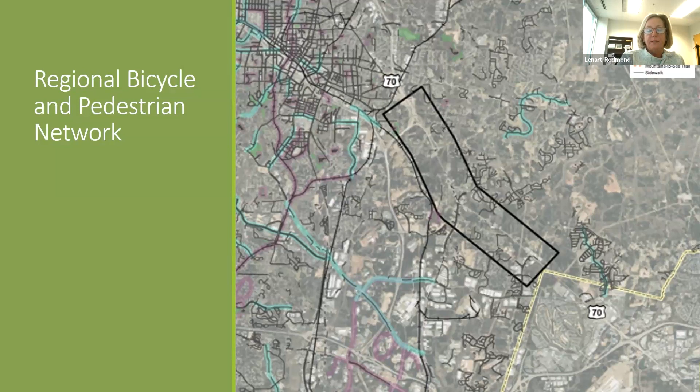What we learned is that there were low volumes of bicyclists and pedestrians crossing over US 70 today. Most of the bike and pedestrian activities are centered around the Angier Avenue and US 70 intersection area, as well as South Miami Boulevard, Sherron Road, and Mineral Springs intersections. Future development will only increase demand for bike and pedestrian facilities going forward.

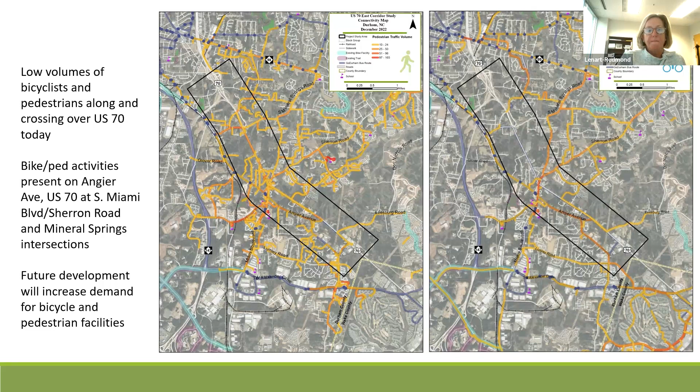As far as existing transit routes, the fixed routes are mainly within the study area along Angier Avenue today. There is no fixed route bus service along US 70 today. US 70 has been identified as a second tier bus rapid transit corridor from a FAST study done back in 2021. However, there are no BRT improvements planned in the current 2050 DCHC MPO Metropolitan Transportation Plan.

There's also a future Route 200 from Durham to North Raleigh. That's a study that's about to be underway, currently in the feasibility study stage. So there are some existing and future bus routes planned for service in the area.

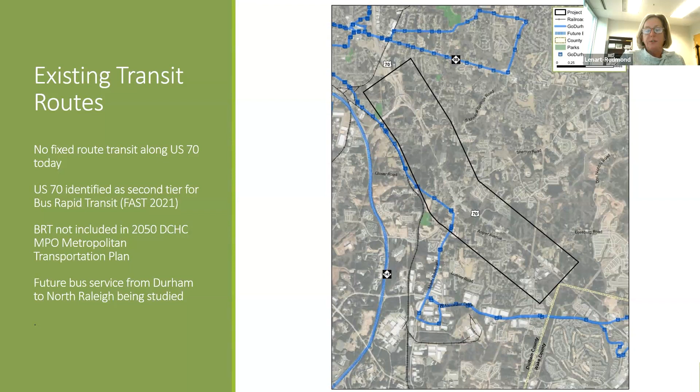We also performed a 2050 traffic analysis that showed most intersections in 2050 will operate at a level of service F overall, with substantial queuing throughout the network.

When the study team developed these alternatives for the 4-lane boulevard section, we made several assumptions. We decided to use innovative intersections to relieve congestion for both alternatives presented today. Now, alternative 1, the 4-lane boulevard section, we also assumed there were going to be no bridge structures at the intersections — everything was going to be at one level.

But with alternative 2, we also used innovative intersections to relieve congestion, but we did introduce bridge structures at Pleasant Drive and at the future Glover Road extension. Both alternatives incorporate multi-use paths and provide bridge opportunities to cross US 70.

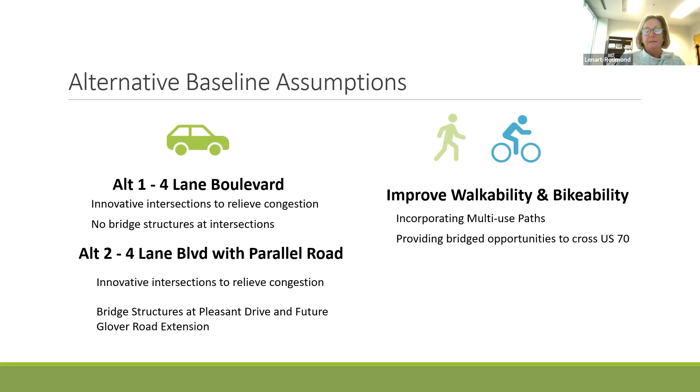Weston Murphy is going to talk a little bit more in detail on each of the alternatives and the innovative intersections that we are using along the corridor.

They're median U-turns, which eliminate left-hand turning movements and reduce delay, providing shorter wait times for vehicles traveling along US 70. Median U-turns are cost-effective compared to adding additional lanes to increase capacity in general, and they improve vehicular safety by reducing conflict points.

This is a schematic of how to navigate a median U-turn. Through the elimination of left-hand turns and pedestrian signal enhancements, it makes it safer for bicyclists and pedestrians to cross US 70. To make a left turn from US 70 onto a side street, vehicles would have to go through the intersection and make a U-turn before turning right onto the side street. Eliminating left turns again makes it much safer for both bicyclists and pedestrians.

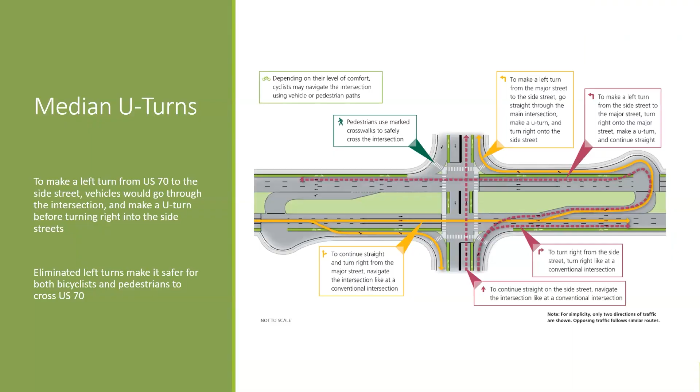And if you could pause here and go back, there was a question about seeing lots of grades assigned based on traffic flow. I don't know if you or Doug would like to address what's in the chat. Okay, let me see, where is the chat? Hold on.

The question is, I see a lot of grades assigned based on traffic flow and predicted traffic flow. Are these equivalent grades for pedestrian, bicycle, and transit flows? If so, how are those balanced with single occupancy vehicle flow? And that could be any team member that takes it. Okay, I'll start off, but I'll allow Trent Moody to chime in here.

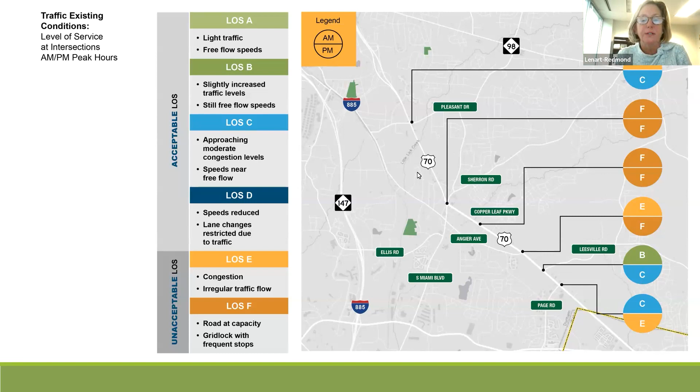But basically, these level of service grades are for vehicular travel along US 70. I don't know if Trent, you want to chime in a little more. I know there was consideration for bikes and pedestrians in developing the alternatives on these innovative intersections, but it's not reflected in these particular grades.

Right. It was more of a qualitative look, I believe, from a bike and pedestrian standpoint, in relation to their comfort. Of course, with median U-turns, as Ann was mentioning, they reduce the amount of conflict points. You no longer have left turning vehicles crossing marked crosswalks with pedestrians, so it makes the pedestrian crossing much safer.

There's also ways to incorporate signal timing into the crossing through leading pedestrian intervals, which would allow the pedestrian to enter the crosswalk sooner, so that drivers are aware of their presence and give them a bit of a head start. So there are some design components that can improve pedestrian comfort and safety with these types of improvements.

Another question here, Trent, was that it? I didn't want to cut you off. No, that's fine, we can move on. Another question was with the new 885 connector, the grade at Pleasant Drive and 70 should be lower during peak times. So I don't know if there's any commentary that could be shared about the grade at Pleasant Drive and 70.

Correct. As Ann mentioned, we did use the base year of 2019 as our starting point, reflective of these quote unquote existing conditions. Maybe base conditions may be a better way to describe what's being illustrated here. So that would be prior to the 885 connection. The struggle with this has always been having reliable data with the pandemic, so we really went back to 2019 as our starting point for a lot of our data to date.

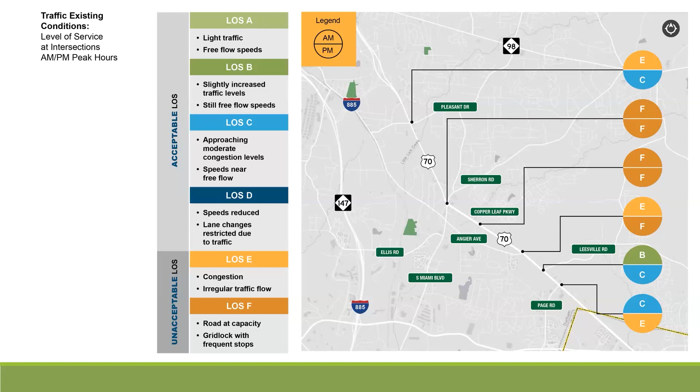Another question: were traffic circles considered as an alternative to left turns or U-turns? Certainly, and I believe the last slide flashed before we started the questions showed there were some roundabouts, incorporated in combination with median U-turns and what are called bow tie intersections. The roundabouts on the side street kind of replicate a bow tie from that standpoint. So the roundabouts are more on the side streets, whereas the volume on 70 would not be conducive to processing traffic at a roundabout on the main line itself.

Okay, and with the boulevard design, what is the level of service for US 70 in this East Corridor for 2050? There are segments that still perform, there are intersections that do perform at LOS F. However, by and large, you'll see in future slides that travel times do improve. When you look at it from a corridor perspective, there are some signals that somewhat meter the traffic, allowing other intersections to operate with improved, less delay. But there is still some complication with the amount of growth projected with the 4-lane boulevard concept.

And I think next to last question here: are median U-turns permitted on a roadway that is freeway rated as a section that feeds 885? I'm not sure if I understand the question clearly. However, if the roadway were classified as a freeway and went to a freeway design standard, there would be no median U-turns, there would be no at-grade intersections there. So the segment here is basically a boulevard transition point between the freeway as 885 is approached.

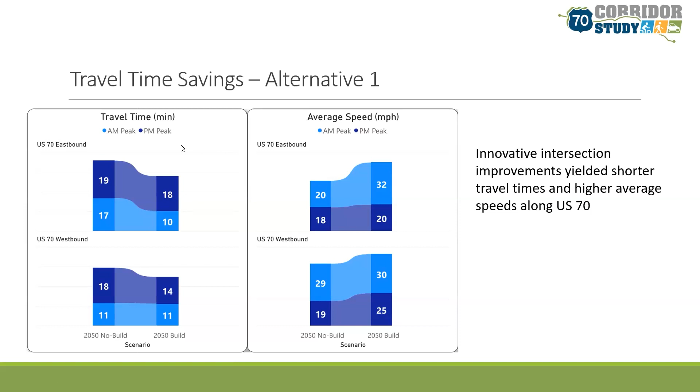As Trent mentioned, we did take a look at travel time savings comparing the 2050 build alternative for alternative 1 against the no build. And we see in general, the innovative intersection improvements yield lower travel times and savings and higher speeds along US 70. Due to the diversion of local trips off of US 70 to the parallel roads, alternative 2 would show even shorter travel times and higher average speeds along US 70 than alternative 1.

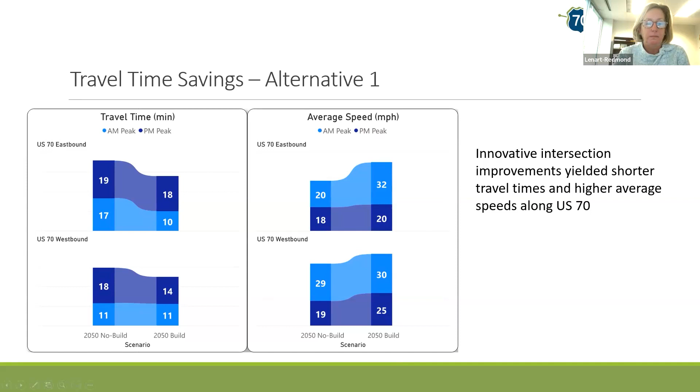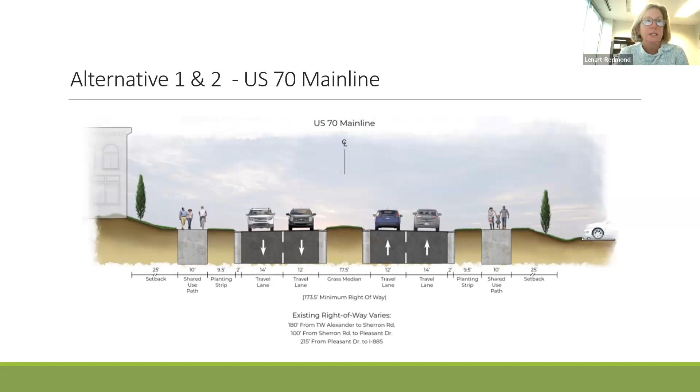So first, we're going to look at the typical sections. This is the same typical for both alternatives along US 70. So you have 2 lanes each way, and a 9.5-foot grass buffer between the multi-use path and the edge of travel of the road, with 10-foot multi-use paths along both sides of the corridor.

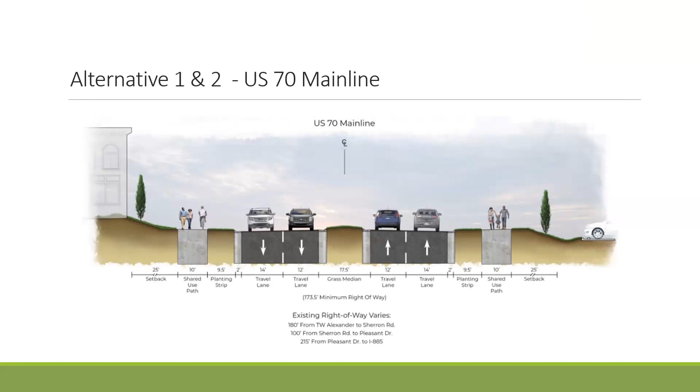So this is on alternative 2 where we have the parallel roadways. We reduced that grass buffer to 4.5 feet since it's a lower speed roadway, and we still have 10-foot multi-use paths on both sides.

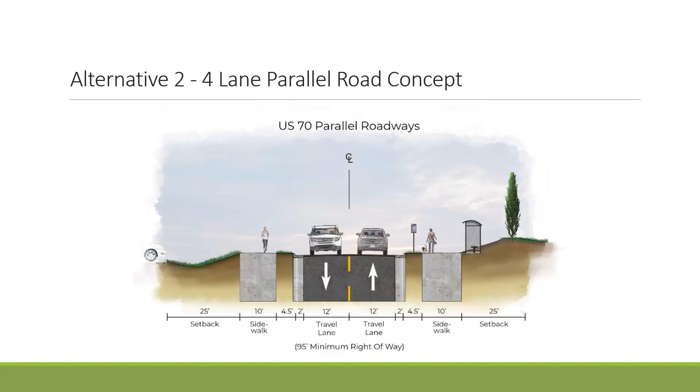And then I'll start to share my screen here to show you the concepts. Yep, I stopped sharing. All right.

All right, so here we're going to start at the northern end of the corridor. Here's the East End connector. You got 885 here, we got Lynn Road, we got Pleasant Drive up here and down here. We also have a future Lynn Road extension up there. You can also see here, these white areas are the future developments coming in. Also note that this yellow shade is your multi-use path or sidewalk.

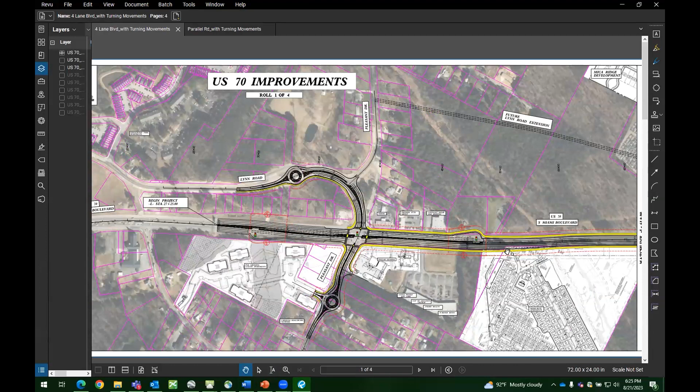So I'll go through how to navigate this intersection in more detail. If you're traveling south on US 70 and you want to take a left onto Pleasant Drive or Lynn Road here, you would go past the intersection and use this U-turn to then take a right turn onto Lynn Road. And the same thing going the opposite direction, you would use this U-turn to go left onto Pleasant Drive.

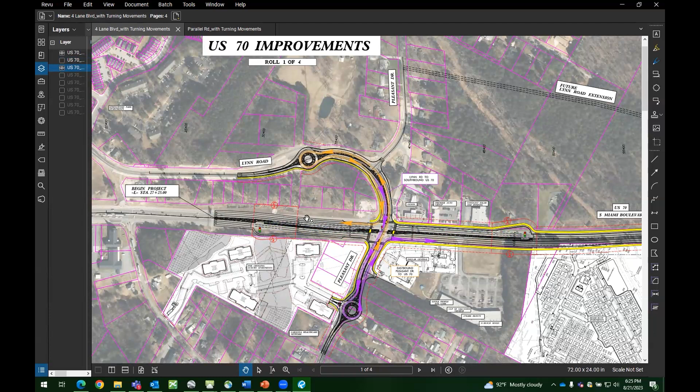And then if you're on the side roads and you want to take a left, so you're coming up Pleasant, you would go through this intersection, use the roundabout, come around here and take a right to go north on US 70, and vice versa. If you're going down on Lynn Road here, use this roundabout to go south on US 70. We've also added these crosswalks there for bikes and peds. It's much safer for bikes and peds to cross this type of intersection compared to a traditional intersection—you have a lot fewer conflict points because those left turns are no longer there.

And then here we put in some bulb outs, so these are to access these businesses on this side. So you're driving south on US 70 and you want to get over to JJ's Fish and Chicken—you could use this U-turn to access the business on that side, and vice versa, coming up the other way, you use this U-turn to access this side of the road.

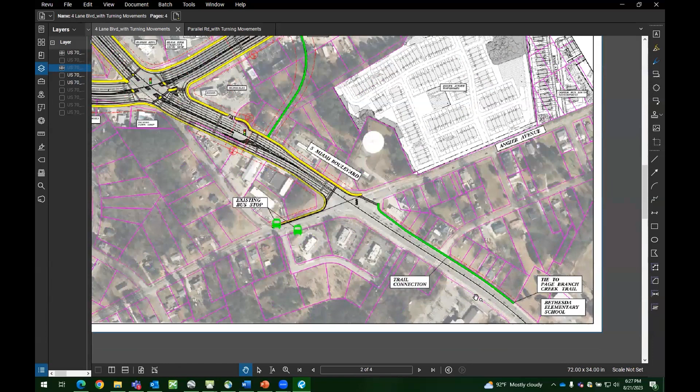So here we have Sharon Road and we have Miami Boulevard here, and also Angier along the bottom of the screen there. This is one of the trail connections we're proposing in green. Up here is the tie to the future Lick Creek Trail, and down here along Miami, we're tying to the existing multi-use path at the elementary school to Page Branch Creek Trail. We're also showing 3 different pedestrian bridge options on this concept.

So these bridge options could go either on this concept or on the next concept that we'll look at, but we don't intend to build all 3 of these bridges. We're just going to build one of these, and we want to get your feedback on which ones you would use, which ones you want in this area—just trying to get an idea of what the public wants.

So I'll now go through how to navigate this intersection here at Miami. It works just like we saw before with the median U-turns. If you're on US 70, you go through the intersection, use the U-turn both ways.

It's a little different on this road here—we don't have a U-turn here. So instead you would go right through, take a left onto this little side street, and then take a right onto US 70. And it works the same with the median U-turn if you're going south.

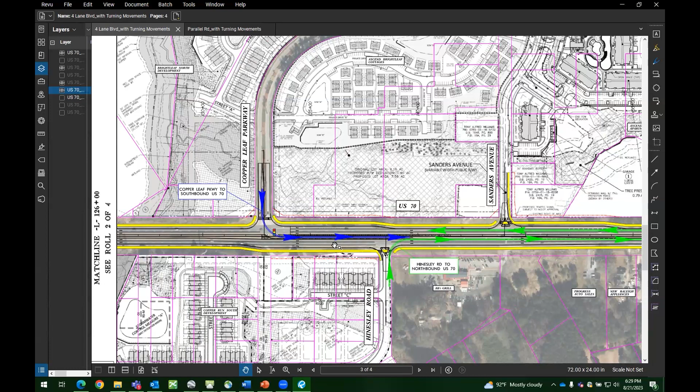So at Copperleaf, we're currently showing a green tee with this option. The way a green tee works is you're not allowing left turns into Copperleaf, but you do allow the left turns out. It's called a green tee because the southbound direction here always stays green and never has to stop. Just this direction gets stopped to allow this left turn to come out.

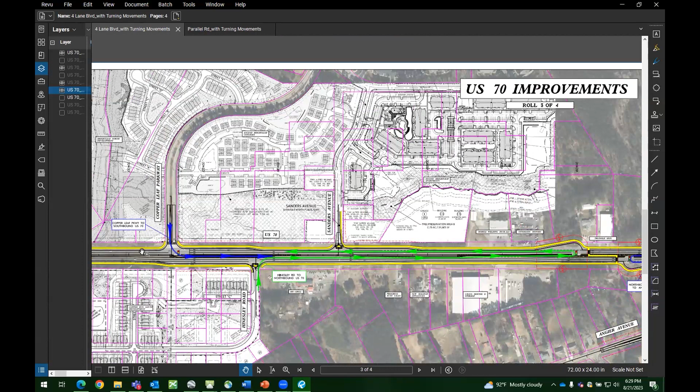And we put in a U-turn here because if you're on Hinesley and you can't take a left out, you would need to take a right and use this U-turn to go left onto US 70.

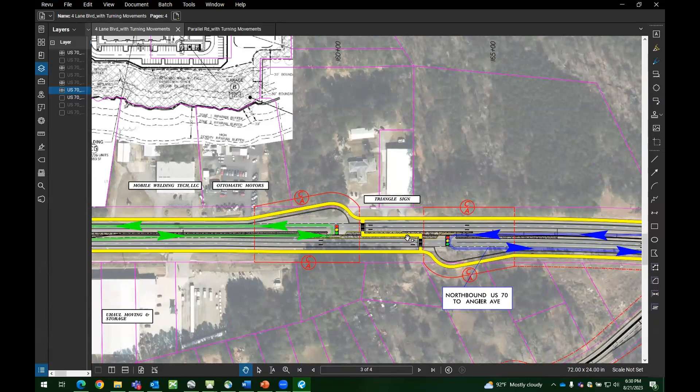In this option, we're showing a mid-block crossing here in between our two bulb outs. This is a safe way to cross with there being a signal on either side, and this could be incorporated into either option.

We'll move down to the Angier Avenue intersection. This works just like the other median U-turns going through the intersection, using the U-turns to replace the left turns.

Same thing on the Y lines. You would use these roundabouts to replace the left turns at the intersection level. And this ties into the future development with the roundabout here.

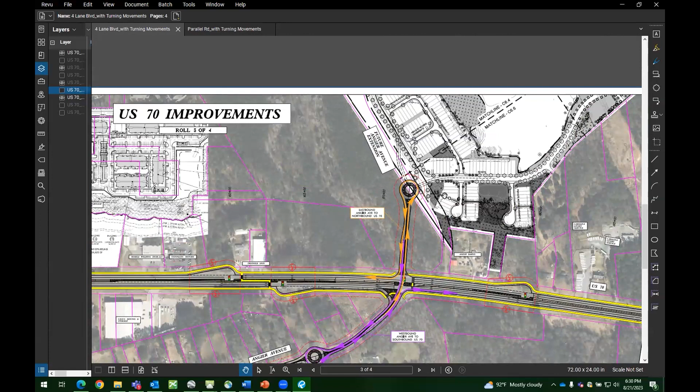We'll continue down to the last sheet here.

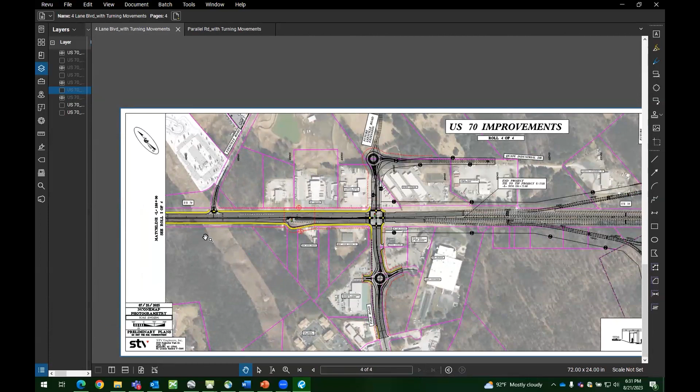So here we got Leesville Road, and here's the future Leesville Road extension that we bring into a roundabout across the street from Page Road. This works very similarly to the other median U-turns that we looked at.

There is one minor difference here. As you go through, you notice there's no U-turn on this side. So instead of using the U-turn here, which we didn't put in due to the proximity of this interchange, you would actually follow the green here, just take a right, use this roundabout, and do a left in that fashion.

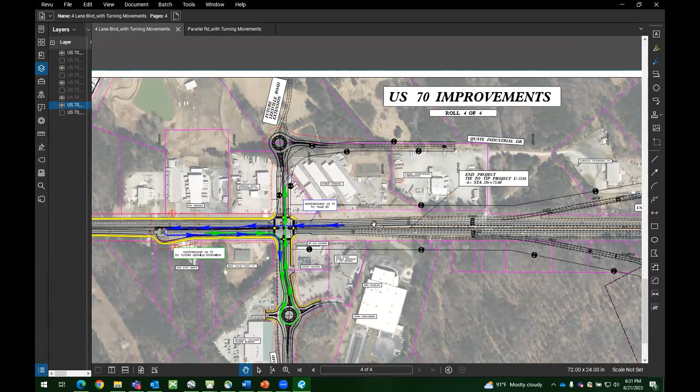And you could do the same thing with blue. Instead of using this U-turn, you could use this roundabout to take the left. You kind of have multiple options there.

All right, we've got a few questions in the chat if you're ready. Sure, yeah, we could take some of these questions on the first concept.

Yeah, and there's different folks who may need to respond. But the first one is, do these designs take into consideration future development, such as the new multi-housing development coming into the Brightleaf off Copperleaf Parkway?

So yeah, we did consider all the developments that we had access to here. We did try to incorporate our designs with the developments that are coming in.

Does the proposed design speed limit need to be such that traffic circles would not work along US 70? Is the plan to increase traffic passing the established businesses on US 70?

I can let Trent speak to this more, but I believe roundabouts don't have the capacity to be on US 70, is that correct? That's correct. Really the existing volumes today are such that the roundabouts along 70 would not function well, and then compound that with planned future growth, which would also impact the operations of roundabouts on US 70.

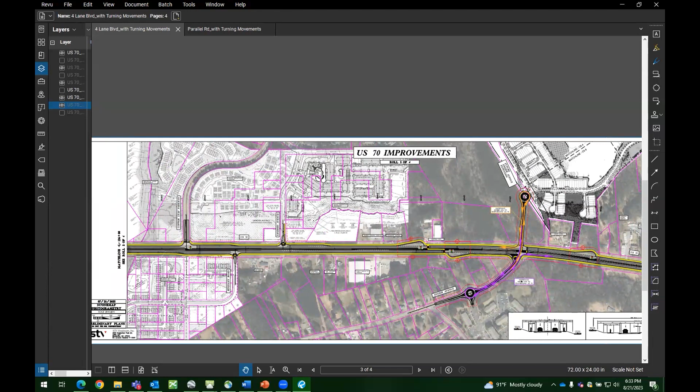For the proposed peak hour speed for 2050, will this back up traffic on the freeway on I-885 and Wake County Freeway?

I'm going to try to get my bearings right here. Yeah, right, so on the northern section there towards 885, there are, in future scenarios, there is queuing at that first U-turn bulb that does back up. And I believe that is consistent with what is today, unfortunately.

Where is there an existing boulevard design in the area with the same volume?

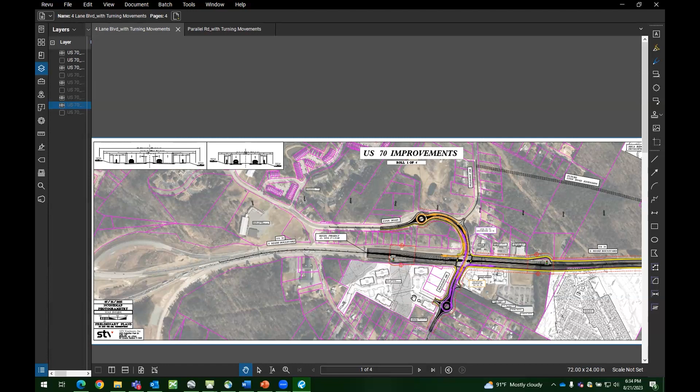I think the person's asking for a similar design as well. I can't think of one off the top of my head, but Trent, Ann, you want to chime in there? We may not have examples within North Carolina, but there are a few examples outside the state. There was the Woodward Avenue in Detroit, an example of a boulevard section with innovative interchanges, and we can share that information. There's also another project with similar traffic volumes in East Lansing, Michigan. And we also looked at the James Dodds project down in South Carolina. There are probably three other examples of similar traffic volumes using boulevard sections like this, so we wouldn't be the first.

The next question is, what are the traffic volumes now on US 70, and what is proposed to be the traffic volume on US 70 in the year 2050? I don't want to steal anybody's thunder - is that part of the presentation? I can't recall if there was an ADT slide or not.

No, we didn't have future volumes on the slide. We spoke mostly to our existing trend. The volumes do range - it's greater along the northwest side as you go inbound into Durham. I think they range from about 35,000 to 45,000, the last historical record there of AADT. When we were projecting volumes, we used the regional travel demand model to account for future growth, as well as prior studies, and applied roughly a 1.5% growth rate throughout the US 70 corridor, which would result in... let me try to pull up something here. Yeah, we looked at 2050 traffic volumes, which correlated to the regional model.

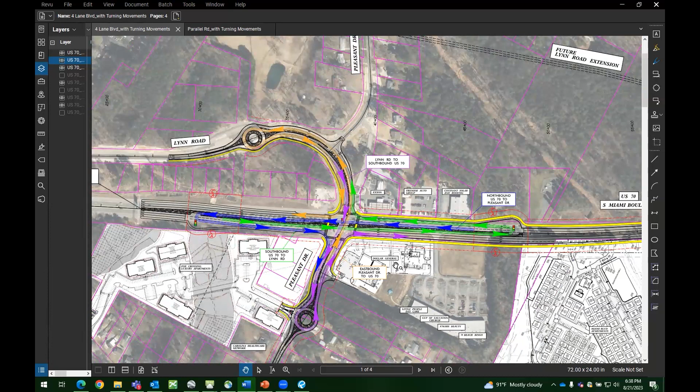How will these designs facilitate the transition from higher speed roads at either end of the corridor to a lower speed environment within the study corridor? This would be handled the same way as in today's environment - you'll have advanced warning signs, and things can be done as far as reducing lane widths, or with pavement markings, in order to help cars visualize the change in design speeds.

Another question about the parallel roadways: are the sidewalks really multimodal, thus allowing bicycles? If so, maybe consider renaming them to encourage bikes and other human-powered vehicles. Otherwise, are bicycles expected to ride along the parallel road? We haven't really got the parallel road concept yet, but we do have a multi-use path alongside those. I'm not really sure what the question was there - maybe we'll address that one when we get to the parallel roads.

The next question was, what is the level of service for the Miami Sherron Road intersection?

Pull that up here and I'll take that question. Does the design improve the backup on Sherron Road in the morning at the intersection with Mineral Springs?

It does do that. The level of service is improved, and the delays do improve compared to the no-build with the innovative intersections. That said, there is some metering involved because we're running these simulations so it operates kind of as they would in the field. So if someone is upstream or downstream at a traffic signal being held up, the volume isn't necessarily getting through, but that is why the level of service may be a little bit improved compared to what one would traditionally believe.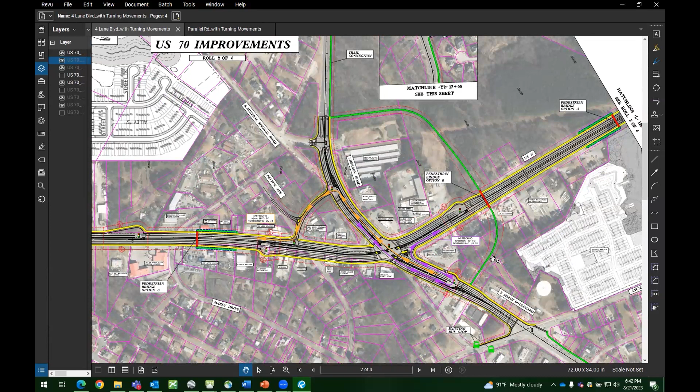So yes, one of the bridges that get incorporated could accommodate a bike, but you also have the option to use the multi-use path and crosswalks at this intersection as well.

I'll do two or three more and then we'll move along with the slides. What happens if the median U-turn lane fills up? Does it block the left travel lane?

Yeah, that would be what happens if there are enough vehicles trying to get over for the U-turn. That would be a possibility, I suppose, in heavy traffic.

And will turning right on red be allowed for vehicles entering US 70? I'm concerned about pedestrian and bike safety at some of those crossings. Also, will there be crosswalks for pedestrians? The gaps between the proposed crossings in these drawings look nowhere near where people would be or want to go.

From a right-turn-on-red perspective, that's a bit further along in project development as you get into the design, but you certainly would have the capability to incorporate added layers of safety, like blank-out signs, for instance. These would be digital signs that could read 'no turn on red' when a pedestrian has activated the crosswalk, for that added layer of safety. So that's something that could be incorporated into the intersection design at a later stage of development.

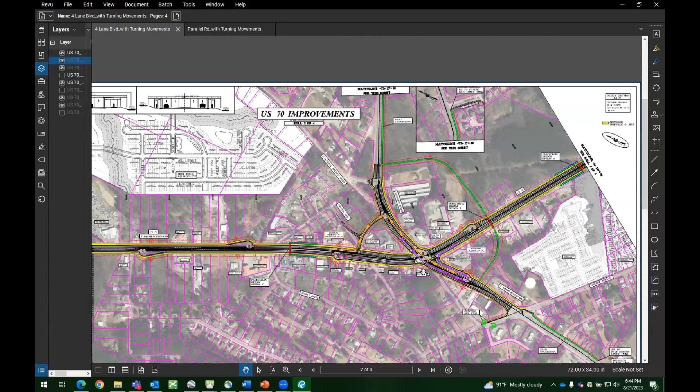Weston, you may want to zoom in on that intersection, for instance, just so they can better see the crosswalks. Zoom on in. There you go.

Were there any more questions, or should we move on to the parallel road? Yes, please feel free to move on. Thank you, okay.

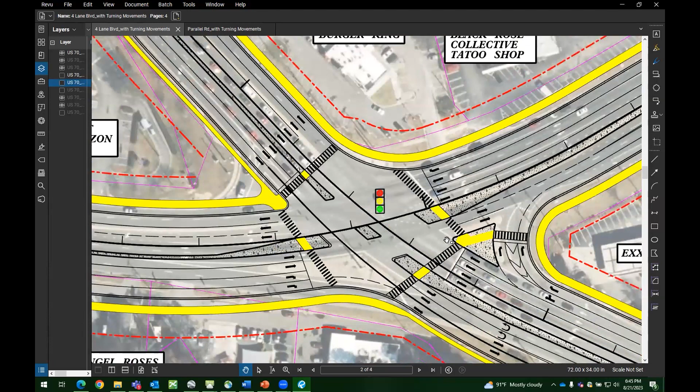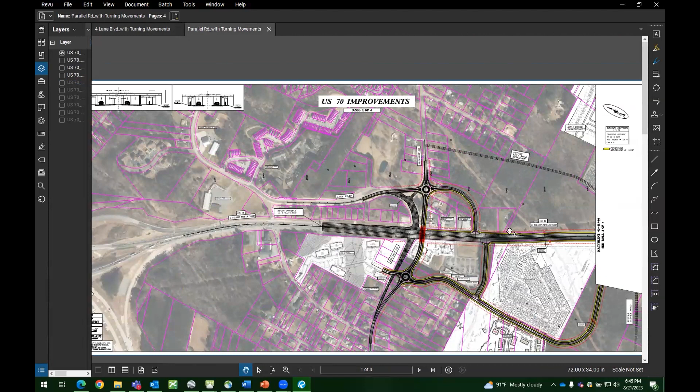So we're back on the first sheet, 885 over here, and US 70 coming down. This is a little different than the median U-turn intersection that we saw before. I'll quickly go through - first I'll give you the key differences on the parallel roads.

So the main differences in the two concepts are: we have a bridge here at Pleasant, and we also have a bridge at the future Glover that you'll see on the next sheet. The other thing is the addition of the parallel roads.

The intention of these parallel roads is to serve these businesses. These businesses that now get access from the parallel road would have their access taken off of US 70, so there'd be a lot less right-in, right-out directly on US 70. The other benefit is it gives bikes and pedestrians a lower speed roadway to travel along the US 70 corridor without being right next to a higher speed roadway on US 70.

And the other benefit of putting in a bridge is it's a much safer crossing than having an at-grade crossing. Now I'll go through how to navigate this intersection.

If you're on US 70 and want to get to Pleasant Drive, you come down here and take a right onto this parallel road, then go either way onto Pleasant Drive. Vice versa, if you're coming north on US 70, take a right onto this parallel road and go either way.

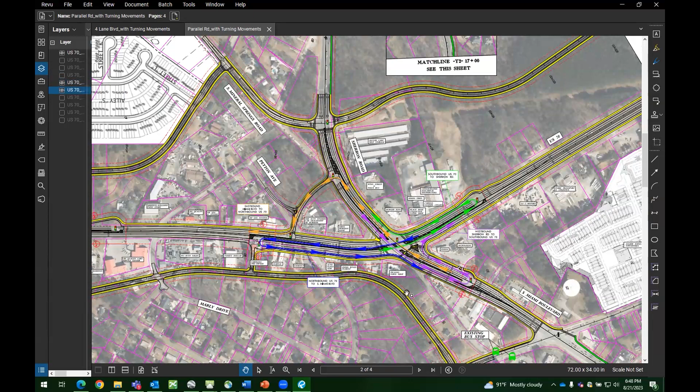This intersection operates the same way as the previous concept with these arrows here. And as a reminder, those pedestrian bridges we saw in the other concept could be incorporated into this one as well. So don't forget to fill out the survey and provide your feedback.

Here's a trail connection as well shown on this concept. And we are showing crossings at all of these intersections with a multi-use path.

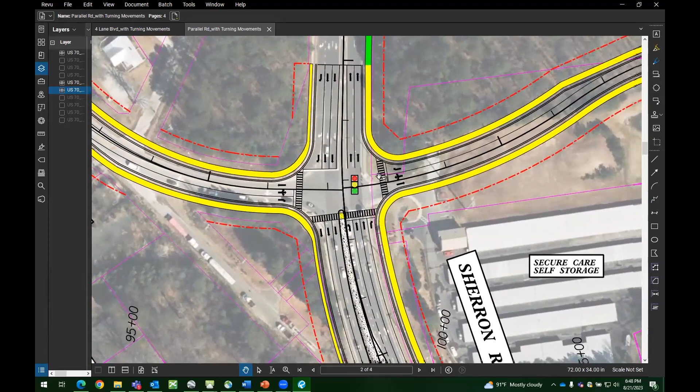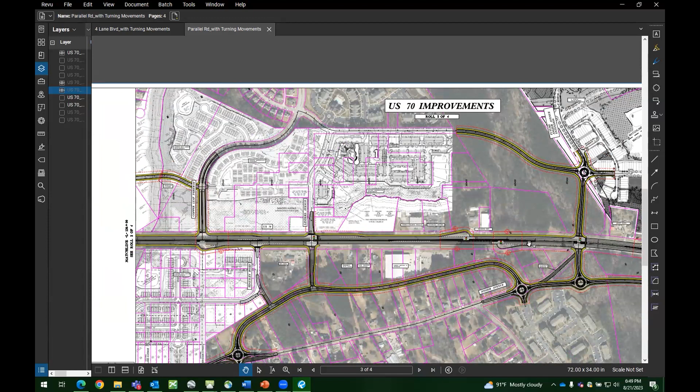I'll continue down the corridor here. You can see our parallel road is now tying into Copperleaf Parkway. We're using Copperleaf Parkway as kind of our parallel road to tie into—that would act as that. You wouldn't be able to provide access to businesses off US 70 here because it's so far away, so not every business would be able to get access from the parallel roads, but we would do that as much as possible.

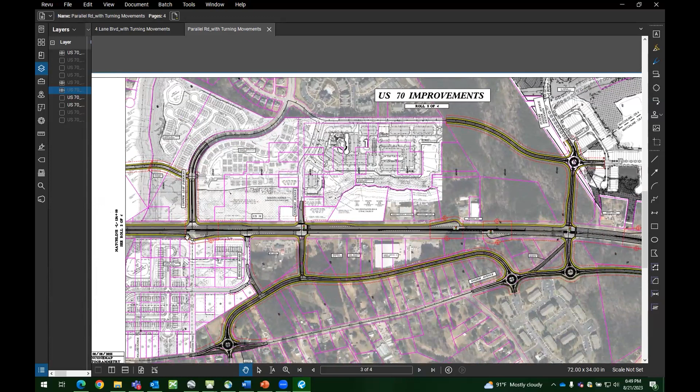This intersection differs a little bit from the first concept I showed you, the green T here. It's now changed to move the main intersection to Sanders, so you would have a median U-turn at Sanders. If you wanted to take a left on US 70, you'd come here, take this U-turn, and then go that way, and vice versa in green.

And then Angier operates the same as the other concept would—median U-turns like we've seen before, using the roundabouts to replace those left turns on the side roads.

You can notice that we're not showing the mid-block crossing in this concept, but that could be incorporated if that's something that's desired.

I'll move on to our last sheet here. This is very similar to the previous concept, just with the addition of these parallel roads tying into the roundabouts. We also extended Quate Industrial Drive up to the future Durham Parkway that you see there.

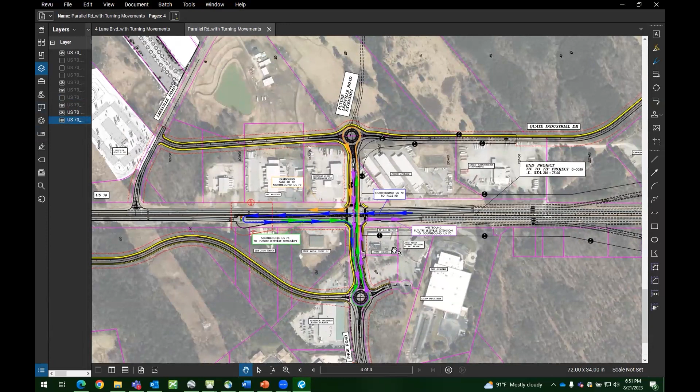I'll turn on these arrows so you can get a reminder on how to use these median U-turns and roundabouts to replace those left turns. And that pretty much wraps up the overview on the parallel concepts.

Thank you. We can answer some more questions if there are any. Let's take some more questions. So one of them—have sightlines been analyzed at all?

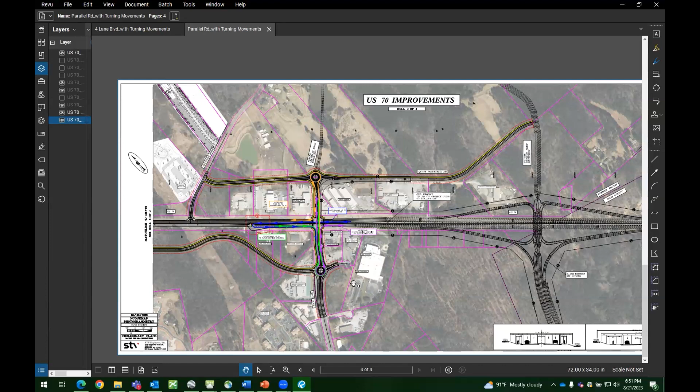The question is whether alternative 2 substantially improves sightlines for turning from Angier onto 70. So we're asking about sightlines. No, I did not do sight distance calculations—we're not at that level of design, but we did look at increasing sight distance in a general sense. You can see that this is very skewed, and we made it more perpendicular, which would help with sight distance, even though we didn't go through the tedious calculations for all these intersections.

And at these roundabouts, they're generally the size that they would need to be, and they do have a lot better sight distance than normal, or than some of these existing intersections do.

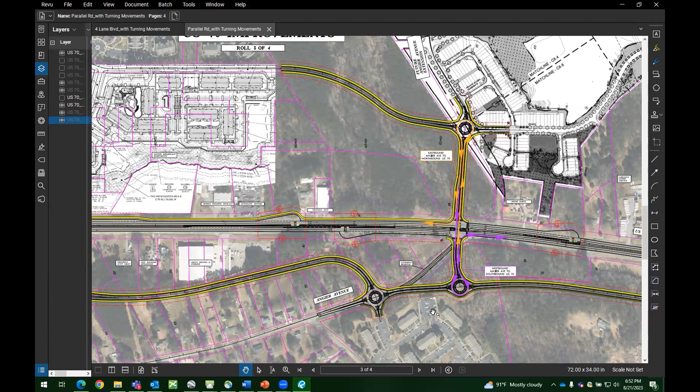There was a question about 50 driveways being eliminated. How many access locations will remain, and are these all on a secondary roadway? I don't think we calculated the amount of driveways that will retain on US 70, but the 50 driveways was the approximate amount we can relocate from US 70 to the parallel roads.

The next question is Angier Avenue. Oh, I'm sorry, did I cut you off? No, you're good, you continue.

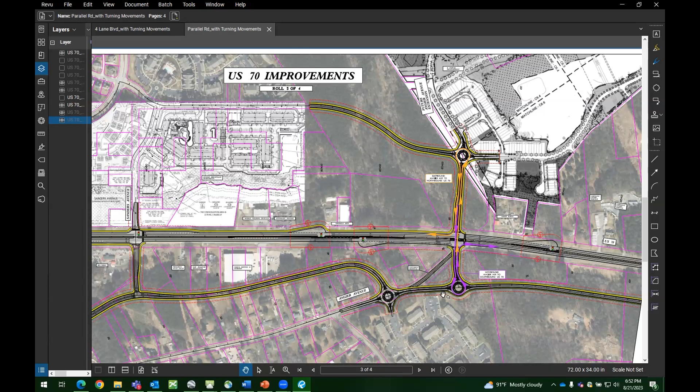Angier Avenue at Miami doesn't have any improvements and is already an issue, and now the parallel road will put more vehicles into this intersection. Do you have plans for any improvements? With this concept, I don't think we're proposing improvements along Angier. That wasn't part of this study.

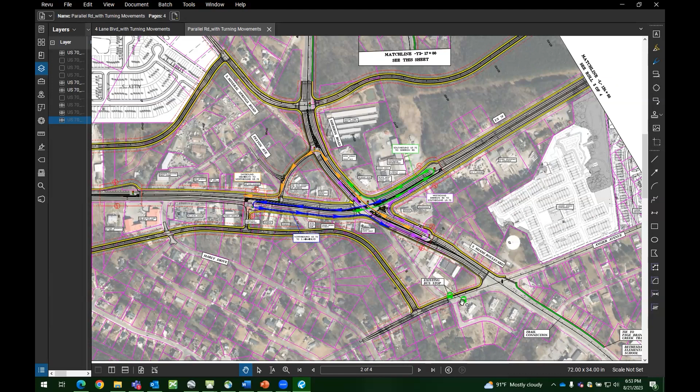The next question is, there's at least one intersection that only has 3 crosswalks. Is that intentional, and could the design be improved to incorporate marked crosswalks at every side of the intersection, since drivers struggle substantially with unmarked crosswalks? So I guess this was the intersection you saw with 3 crosswalks. We could add another crosswalk there. There's not really a real reason we didn't show that, we just figured it may not be needed, but that can definitely be incorporated.

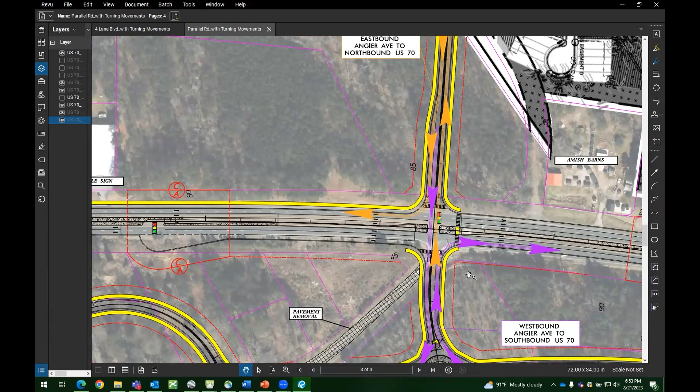Why isn't there a light at the Copperleaf U-turn? There should be, I think that's just a mistake. We should have a signal symbol here. That's a good catch.

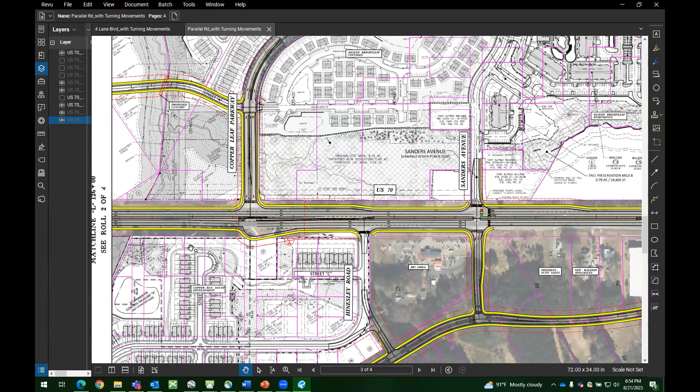Can you please explain how 70 Miami Sherron Road would improve with either of these alternatives? I think they're concerned about the left U-turn still being choke points, coming through here with these U-turns backing up into the through lanes. Is that the concern? That's as best as I could make out from the question. I can let Trent speak to the traffic, but I think this innovative intersection does handle the traffic better than the existing conditions would. It may not be the same as a freeway, but it's definitely less impactful. I could let Trent expand on that.

That's correct, Weston. And the other thing to bear in mind is that these signals are much simpler phased, essentially two-phase signals allowing east-west to go together as one phase and north-south together in one phase. You no longer have to give dedicated green time for left turns and stop opposing through movements, so the simplification allows for more throughput. We've also designed this knowing queuing could occur, having certain through lanes flow into these U-turn lanes so drivers could pre-position themselves while still being able to use the outside lanes to get through.

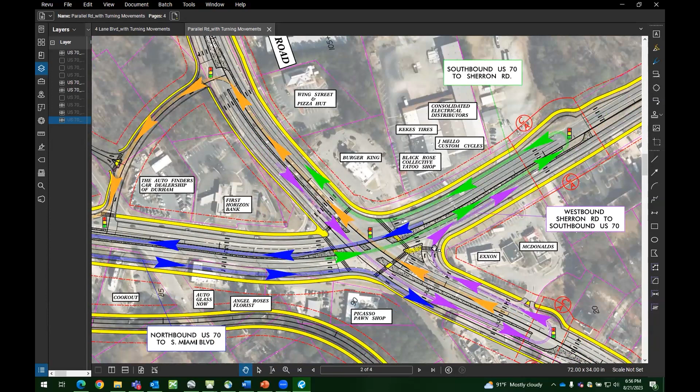Will all these roundabouts slow the overall speed of cars in the area, and if so, is this plan technically more safe for cycling and pedestrians versus alternative one? In terms of the roundabouts, they're by and large on the parallel routes and side streets, so yes, they would serve as a traffic calming device to slow speeds entering and exiting the roundabout, thus improving safety and the interaction between vehicles, bikes, and pedestrians through the network.

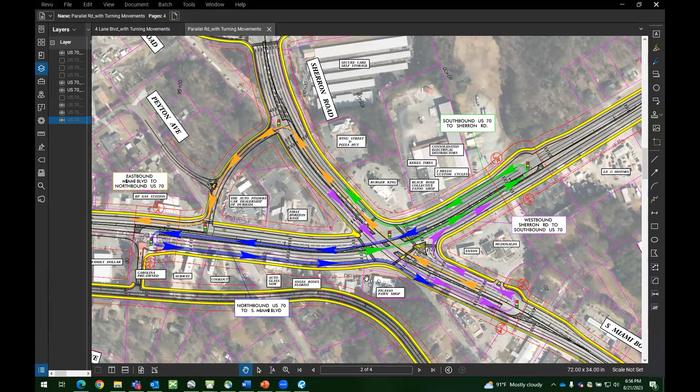A curious question overall is cost. Which of these alternatives is lower in terms of estimated cost? Alternative one, the 4-lane boulevard.

Andrew Avenue appears to be in the study area and is an important parallel street. Is there a reason it cannot be made into a 3-lane street with curbs and protected bike lanes? I guess there's no reason that can't be done, it just wasn't part of this study.

Somebody already asked about cost. Are you going to widen the lanes from 2 to 3 per direction? No, the 4-lane boulevard is the same on both concepts, 2 lanes in each direction. With the addition of turn lanes that would add a few third lanes, but the throughput is just 2 lanes each direction. We were asked to consider a 4-lane section because that's in the Metropolitan Transportation Plan. We did look at how volumes would flow with a 6-lane section regarding traffic diversion, but our charge was to develop a 4-lane section.

How many lights will be on the westbound lane and eastbound lane for alternative 2 and 1?

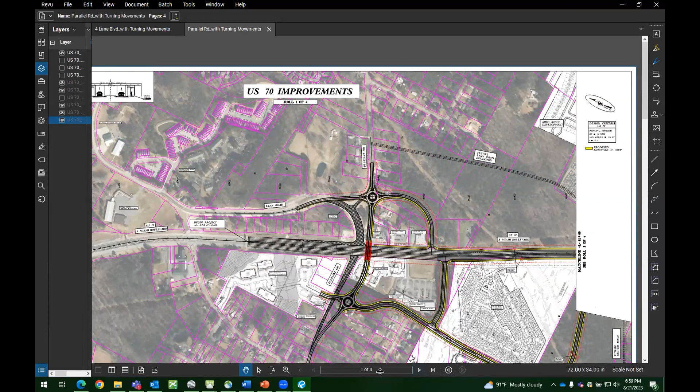With the exception of these 2 bridges that we added, you'd have 3 less signals here: 1 at the U-turn bulb, 1 at the intersection, 1 at the U-turn bulb. It's hard to answer on the fly, but it would be slightly less on the parallel road.

Thank you. We've got about 3 or 4 overall questions that apply to both alternatives. One is whether the results of the study will decide which design is implemented, or if there will be other alternatives. We are hoping to get feedback today on these 2 alternatives, and we do have the ability to take certain components of one over the other to get a preferred alternative.

And how will either alternative affect businesses in the study area? Well, due to the parallel road concept, some businesses will lose direct access to US 70, but they will gain bi-directional access via the frontage roads for the most part. So they remove direct access from US 70, but you get it on the parallel roads, bi-directionally. So there's a benefit to that.

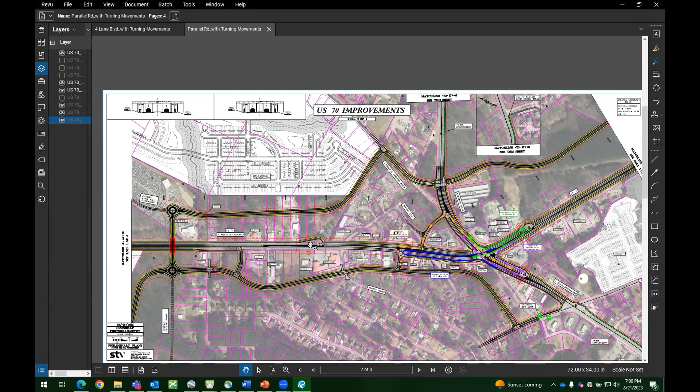I don't know if there's anything else anyone wants to add. No, I think that's the main benefit to the parallel roads as far as businesses go. But since the corridor is essentially the same along US 70, the impacts to businesses there are essentially the same. You do have more impacts to some businesses where we grade separate, because you have to build up to get over US 70.

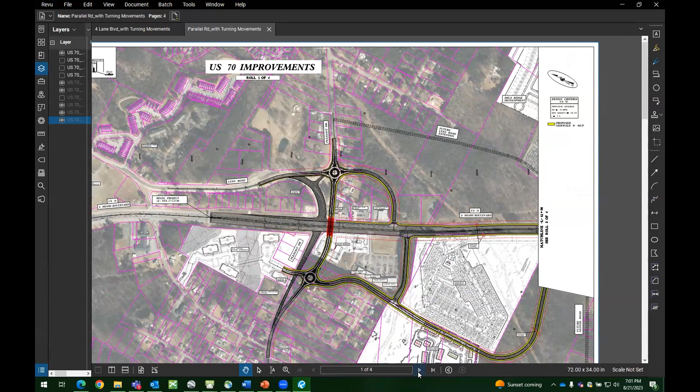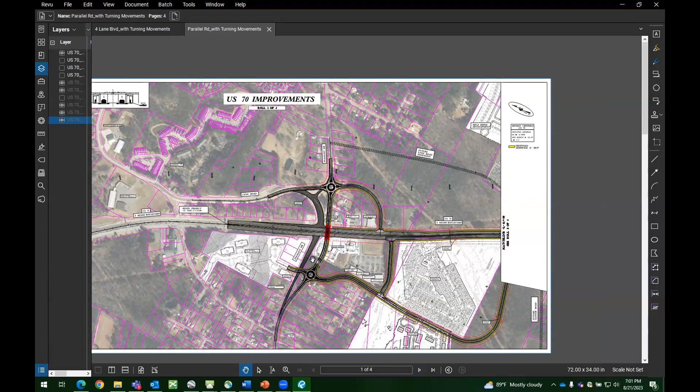And then there was a question about BRT, and any info on how the alternatives facilitate bus rapid transit lines in the future. Well, you're stealing my thunder for the other part of the presentation. I can answer it now, or let's go through the final portions of the presentation since we're getting close to time.

I noticed there's been a lot of questions with regards... Yeah, no, they're all great questions and we want to accommodate them and weave them in at the proper place so we don't get too far past the specific points and images. But yeah, we're ready to go. Okay, I'm gonna take back control now. If you just give me a minute here.

Can you see my screen? Is everything good? Sure, okay, perfect. Okay, now that Weston's given an overview of the alternatives, we're going to talk a little bit more about how we compared these two alternatives.

What performance metrics did we use? Basically, these two alternatives were compared and evaluated on performance metrics based on the DCHC MPO goals and focus areas, mainly walkability, bikeability, and transit focus. We looked at the reduction of conflicts between bicyclists, pedestrians, and vehicles, comfort factors, buffer separations from vehicular traffic, and improved accessibility to transit.

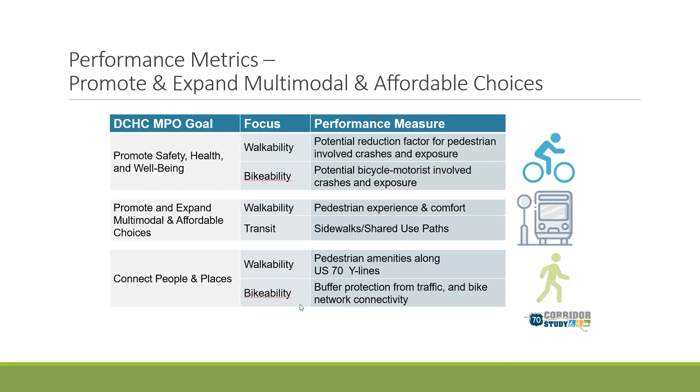Also with regards to bus rapid transit, future transit was considered. Both alternatives were evaluated based on their ability to accommodate future BRT along US 70, and also future bus service within the area. Environmental considerations related to preservation of green space were considered. Vehicular operational consideration included delay, but also travel time savings and vehicular speeds - it wasn't just delay we looked at. We looked at travel time savings along the US 70 corridor when comparing the alternatives.

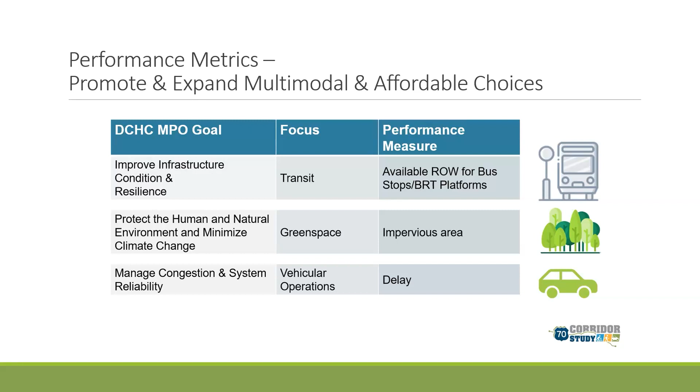So I'm going to take you step by step through each focus group and show you how these alternatives fared. I think I skipped a slide, just a second. Yes, we looked at walkability. We took a corridor assessment based on the number of innovative intersections and signal enhancements as a metric for safety along the corridor.

We found that alternative 2 rated slightly higher than alternative 1, because it had not only median U-turns to facilitate pedestrian crossings across US 70, but also produced a higher number of sidewalks and multi-use paths, a metric of connectivity within the area. Alternative 2 also rated higher with regards to pedestrian comfort, because the parallel roads would allow bicyclists and pedestrians to be on lower volume roads and at lower speeds in the area.

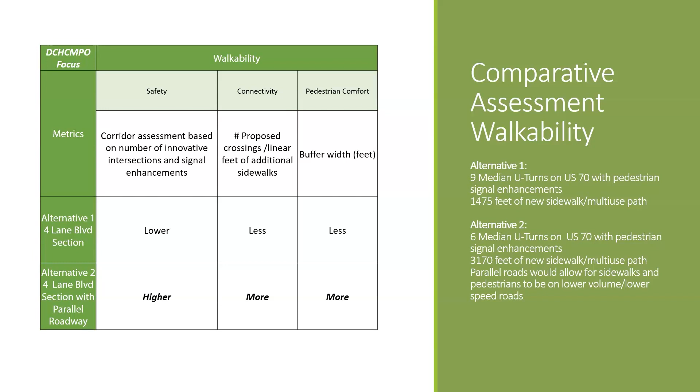Very similar with bikeability. We looked at the same type of metrics. We did an overall corridor assessment based on the number of innovative intersections and signal enhancements. We looked at the amount of proposed linear crossings, trails and multi-use paths, and also the buffers for bicyclist comfort.

Alternative two fared higher than alternative one. It had 3,170 feet of new sidewalk and multi-use paths in comparison to about 1,500 feet with alternative one. It also had two bridge structure connections for trails and bikes, one with the future Glover Road extension and the other at Pleasant Drive. So with regards to bikeability, alternative two came out higher.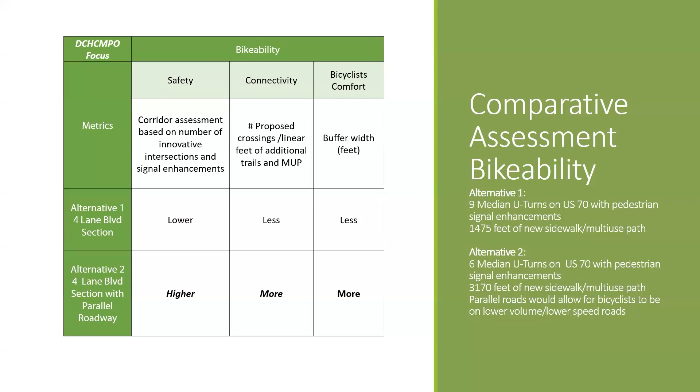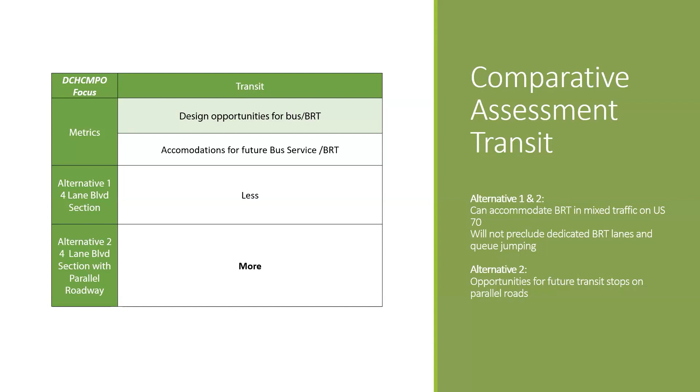With regards to transit, we kind of touched on this before. Both alternatives accommodate future bus service and bus rapid transit within US 70. None of the designs preclude anything with regards to bus rapid transit, such as queue jumping or other characteristics. But alternative two offered more opportunities for future transit and bus service along the parallel roads, so it ranked higher with regards to transit.

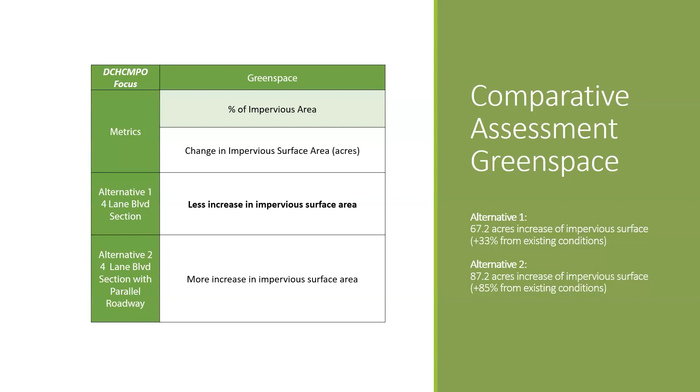With regards to green space, we looked at the change of impervious surface, and alternative one had the least amount of increase in impervious surface area. It was a little bit gentler, kinder to the environment with regards to green space. That was the one area where alternative one fared better than alternative two.

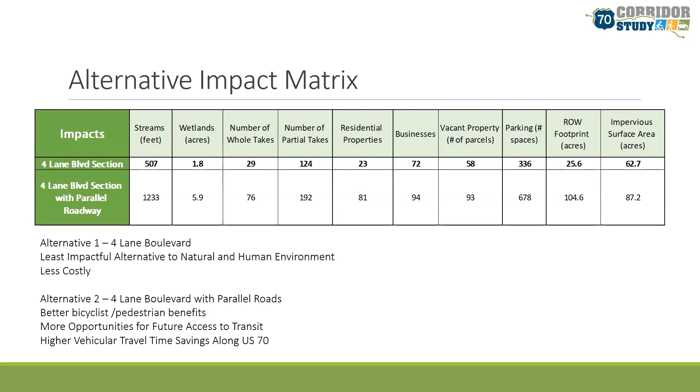So with that, Adil, are there any additional questions? Yeah, I think there were some overall questions about safety, connectivity, cyclist infrastructure, and transit options being balanced with level of service and cost. But I think your last slide may have addressed that.